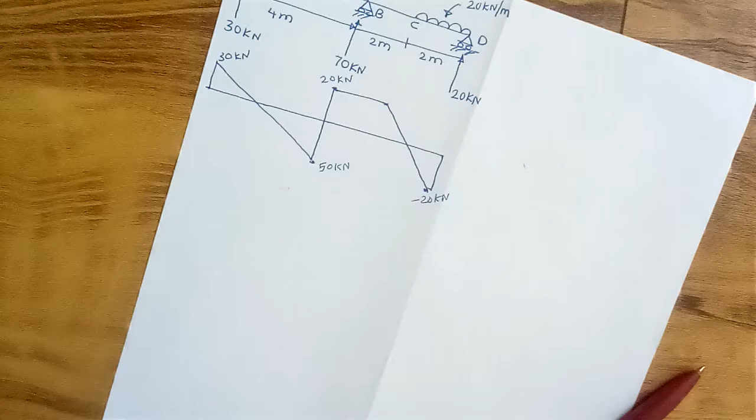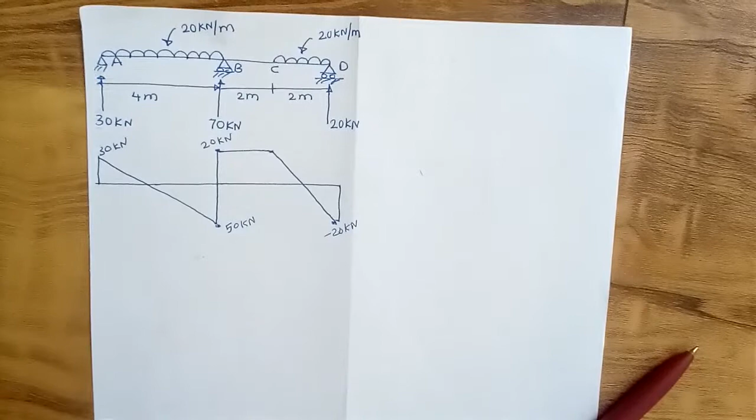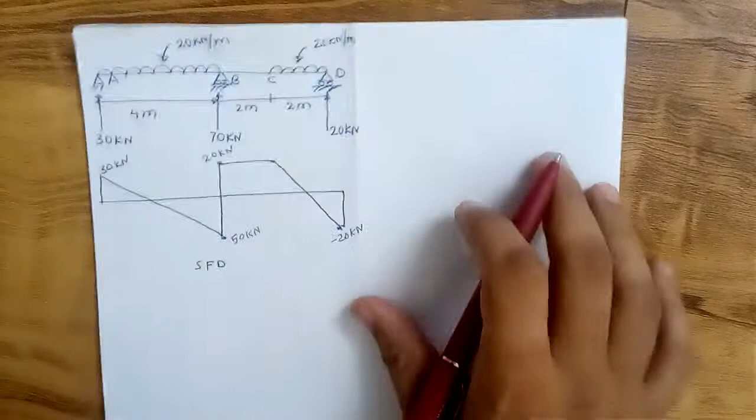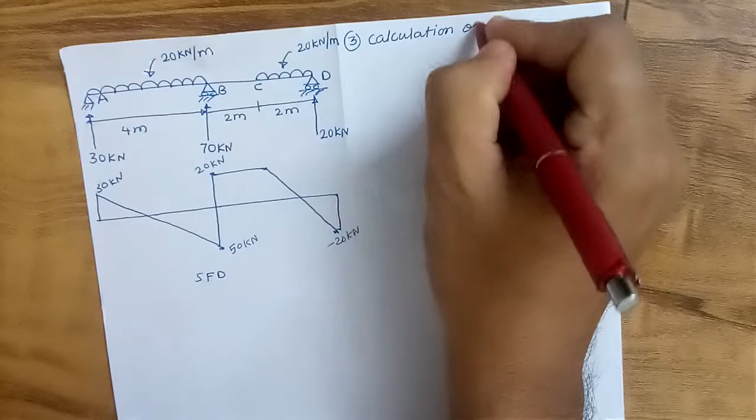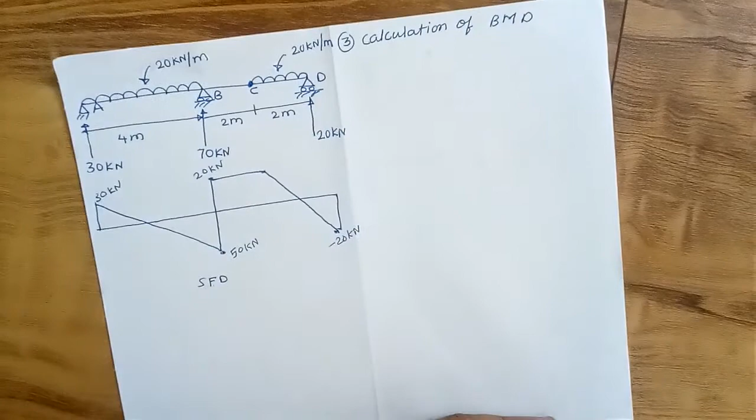So this is the third point, calculation of BMD. Okay, and at this point, that is nothing but point C, there is an internal hinge.

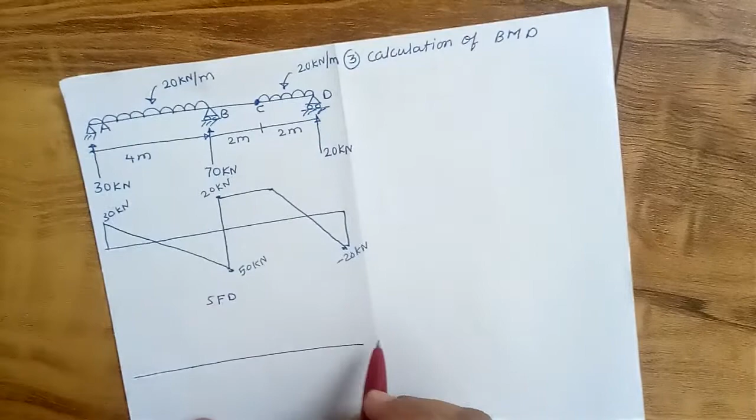So now suppose this is the reference line for drawing the BMD of this structure. Now let us calculate the bending moment at point B. We know the sign conventions like this: this is positive and this is negative.

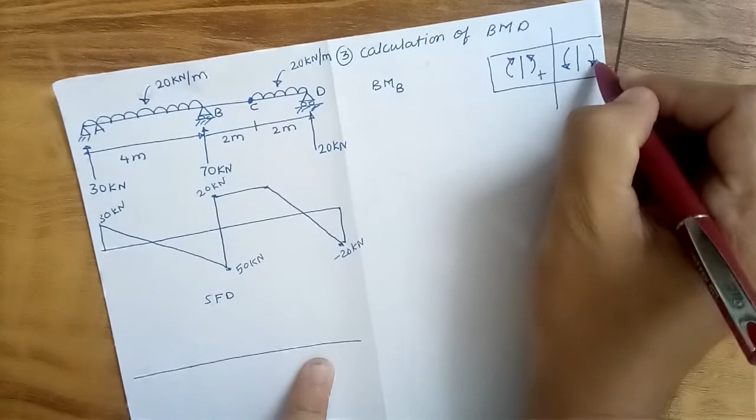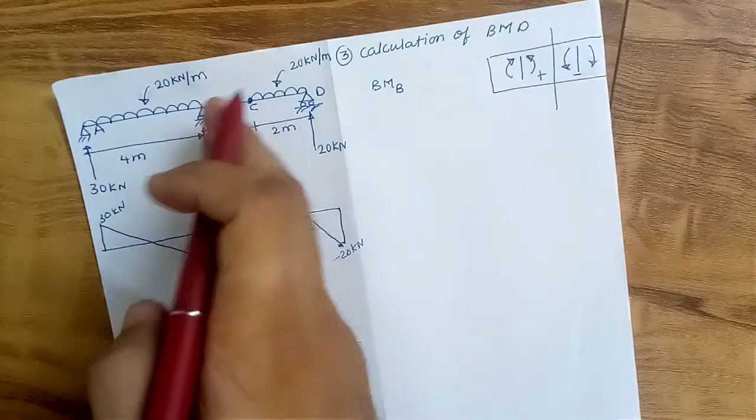So while we are calculating bending moment at point B, let us consider the right side from point B. Okay, so taking the right side from B, it is in anti-clockwise direction, so that will be considered as positive.

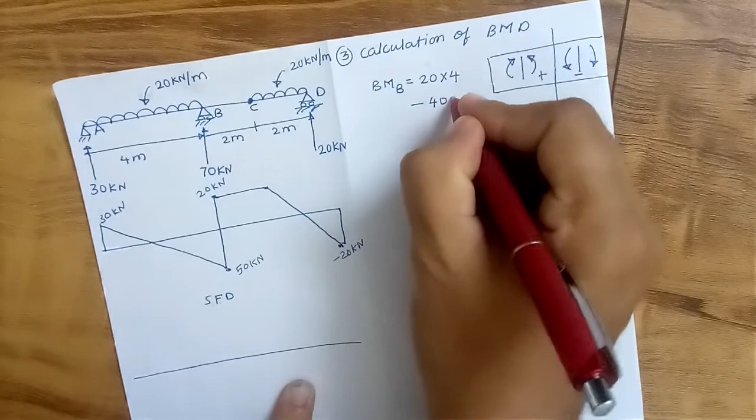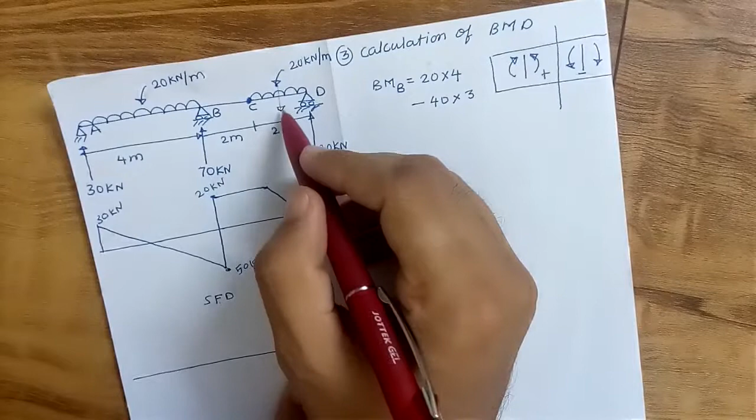So bending moment at point B is positive 20 into 4, and it will rotate in anti-clockwise direction, so that will be negative. That is 20 into 2, that is 40, and it will act at a distance of almost 3 meters, because this will be the point of application of this load. So 20 into 4, that is 80, minus 40 into 3, that is 120 kilonewton meter. So the difference of these two is 40 kilonewton meter.

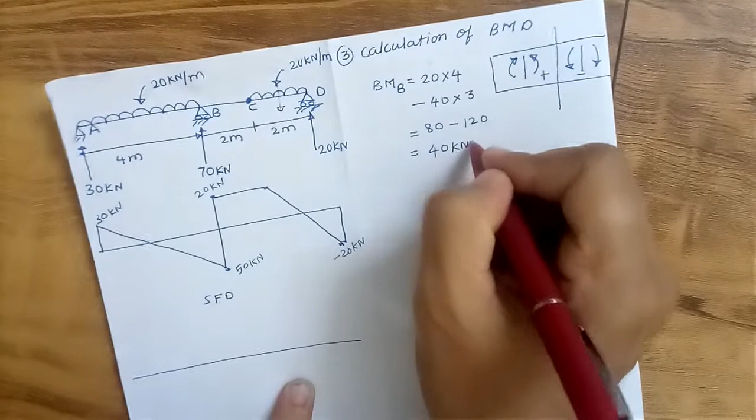So that will be the bending moment at this point, and it will be negative. So this is point B, and below that the bending moment will be 40 kilonewton meter. So we know this point.

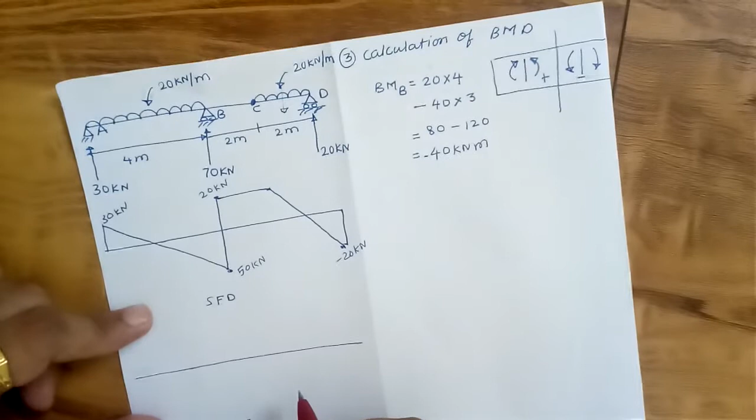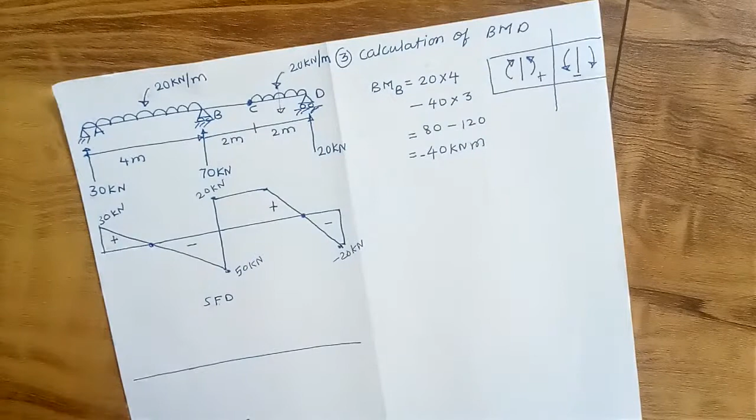But as I have already told you, when there is a change in shear force, there will be maximum bending moment at that point. So here in this diagram there are 2 points where this inclined line is changing sign, the shear force diagram is changing from positive to negative. So at this point there will be the maximum bending moment, and at this point there will be the maximum bending moment. So we should know the exact location of this.

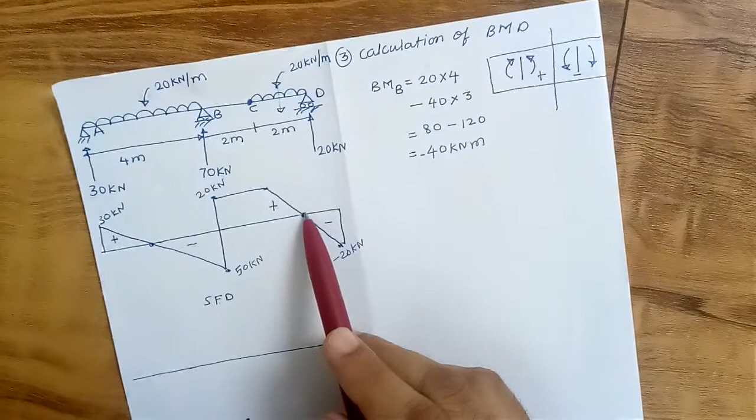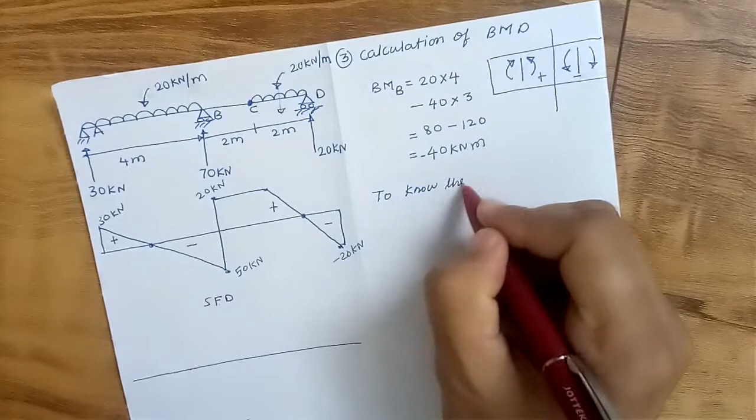Okay, at how much distance from point D is the zero shear force. At that point we will calculate the bending moment. So to know the point of zero shear force from D, we know the sign convention for shear force like this.

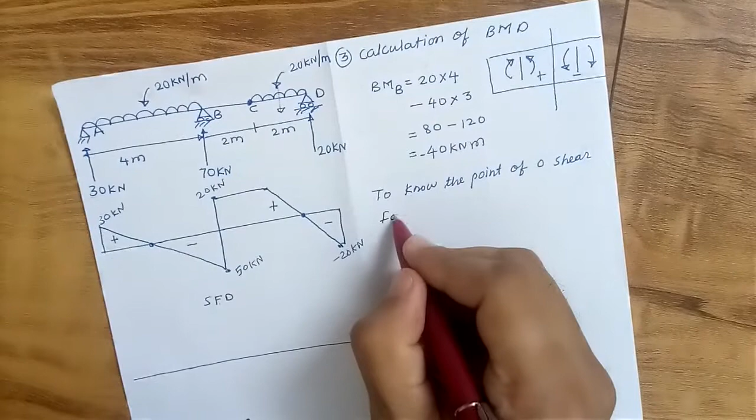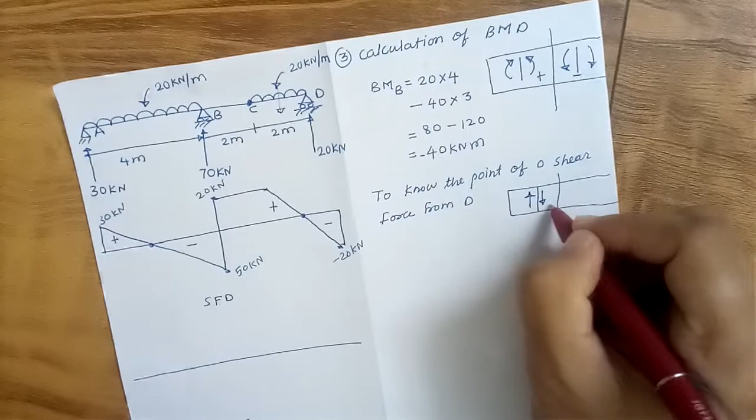This will be considered positive, this will be considered negative. So we know this. So at this point, let this point be E, and it is acting at a distance of x from point D. So this is point E. So shear force at E, we know that at E shear force is 0.

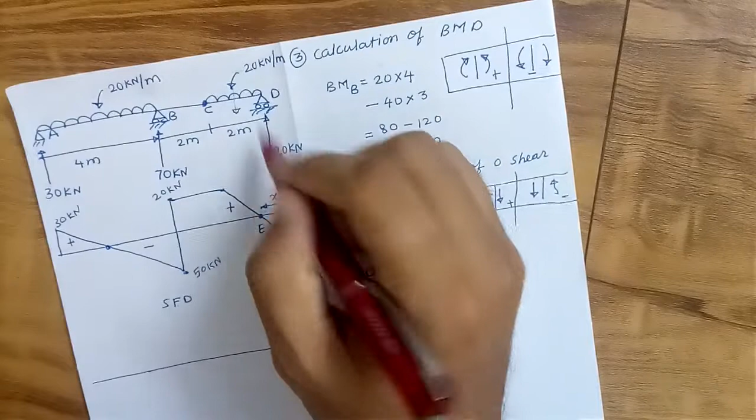So considering the right side of the section, there will be the 20 kilonewton force which is in upward direction, so it will be negative 20. Okay, and this 20 kilonewton load acting at distance x will be acting in a downward direction. So that will be, on the right side of the section, acting in a downward direction.

So that will be, on the right side of the section, acting in a downward direction, so that will be 20 plus 20 into x. Okay, so that's why this minus 20 goes to this side, becomes 20, and is equal to 20x. So 20 and 20 get cancelled and x is equal to 1.

So it means at the distance of 1 meter the bending moment is maximum. So let us calculate the bending moment at that point. Okay, so now the bending moment at point E.

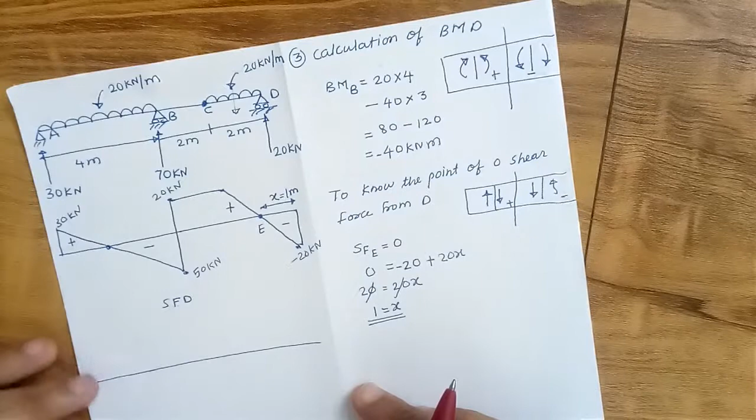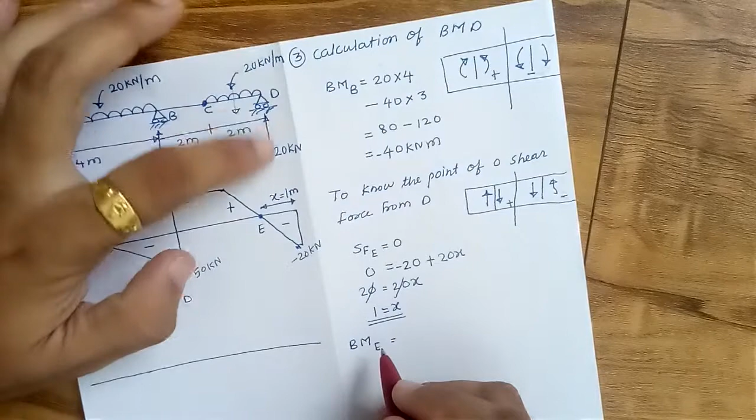Okay, so this 20 kilonewton force is going to rotate in anti-clockwise direction, that will be considered as positive as per the bending moment sign convention. So that will be positive 20 into 1.

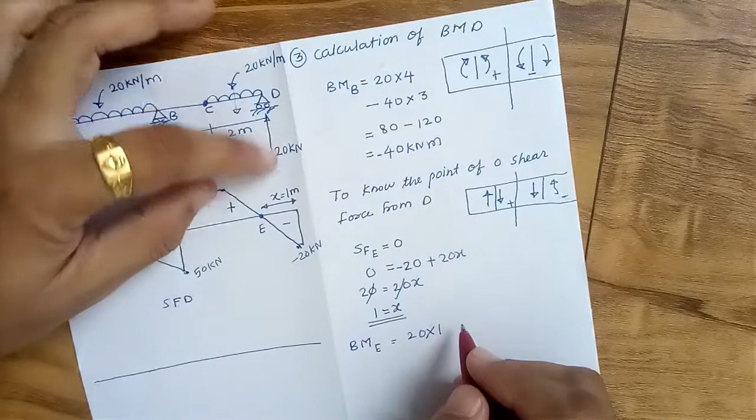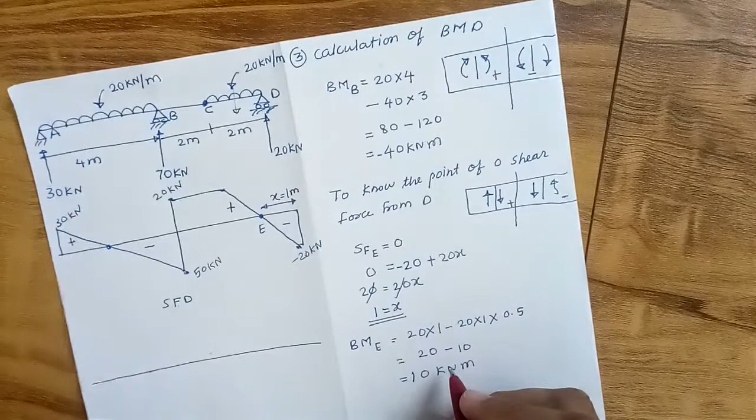And again this load acting 20 kilonewton per meter on 1 meter length is in clockwise direction, so that will be considered as negative. So it will be negative, that is 20 multiplied by 1 multiplied by, it will act at a distance of 0.5, 20 into 1 into 0.5. So this is 20 minus 20 into 0.5, that is nothing but 10. So 20 minus 10 is nothing but 10 kilonewton meter. So this will be the bending moment at this point. So at point E there will be the bending moment of 10 kilonewton meter.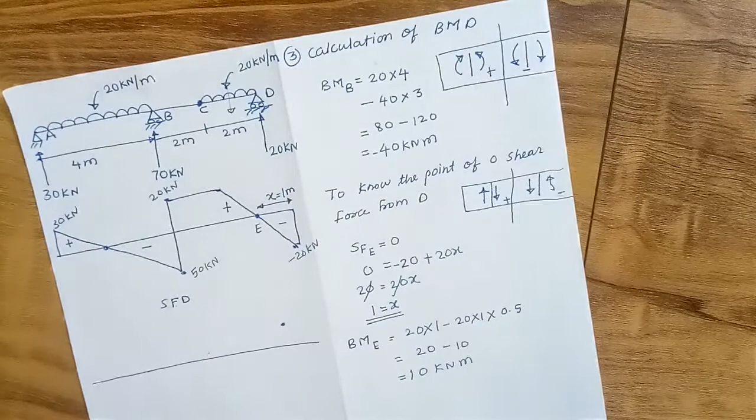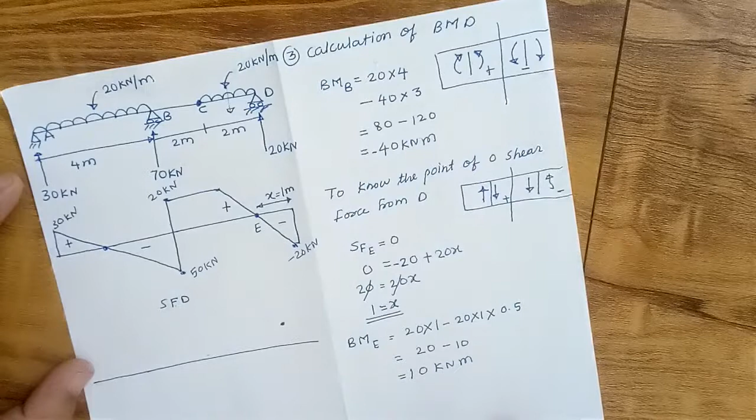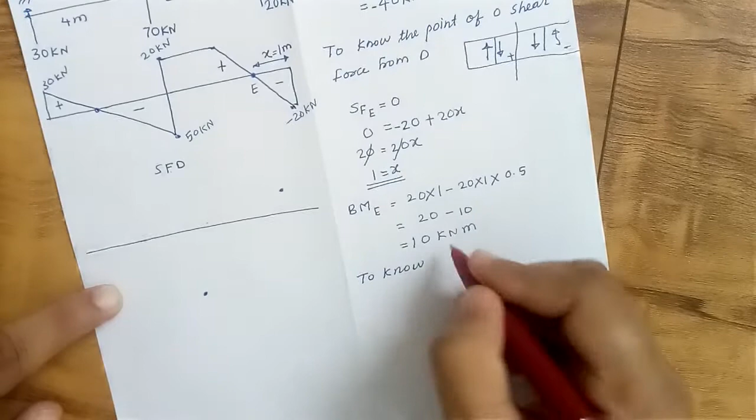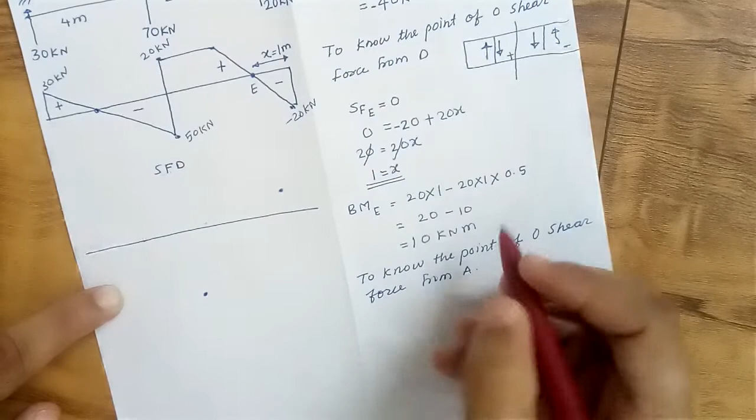Now again here there is a point of zero shear force. So let us look to find the point of zero shear force from point A. To find the point of zero shear force from point A, let us consider this point as F, and let us consider it is acting at a distance of x from the A support.

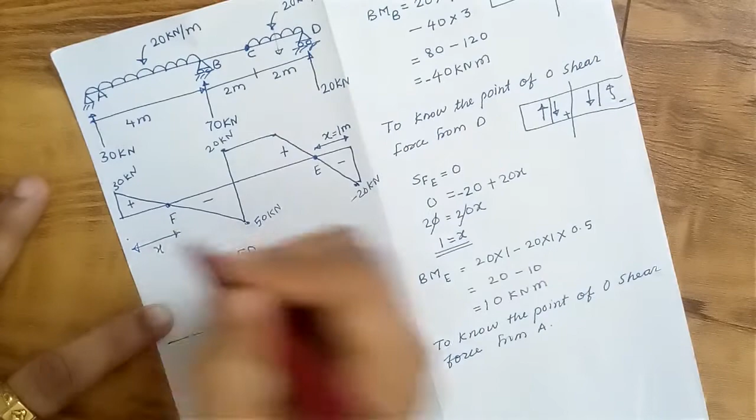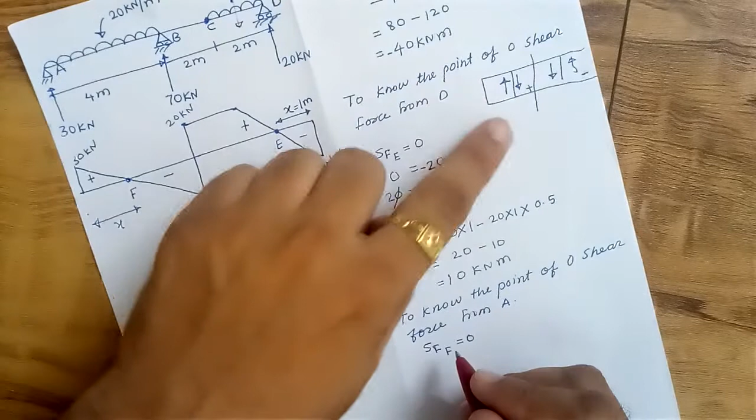Okay, so we know that shear force at F is 0. So consider the left side of this portion and calculate the shear force. Left side in upward direction is considered as positive, so that's why 30 will be positive. 0 is equal to 30 minus 20, as right side, left side of the section in downward direction, so that's why it is considered as negative, minus 20 into x. So minus 30 is equal to minus 20x.

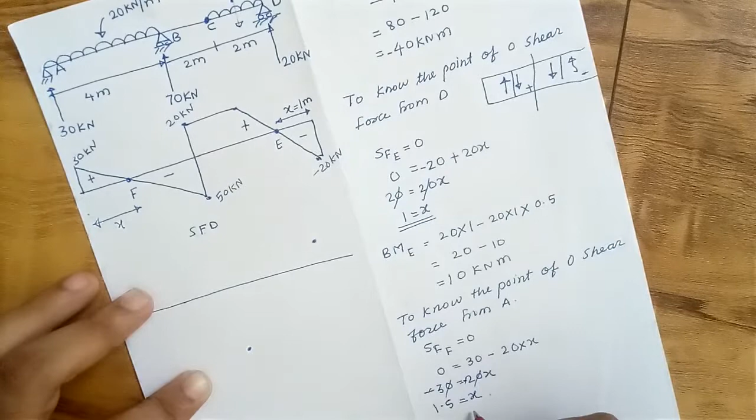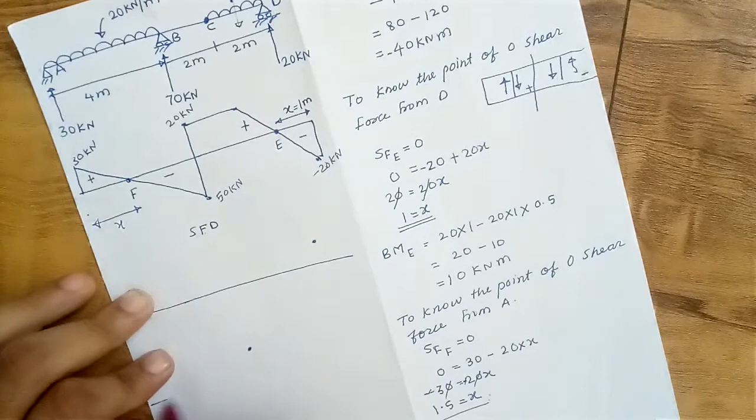So this gets cancelled, 3 by 2 is nothing but 1.5. So at a distance of 1.5 meter, the shear force is going to be 0. So let us calculate bending moment at point F.

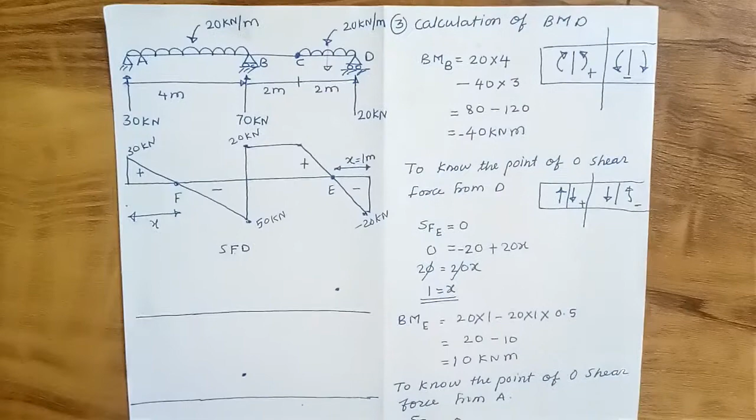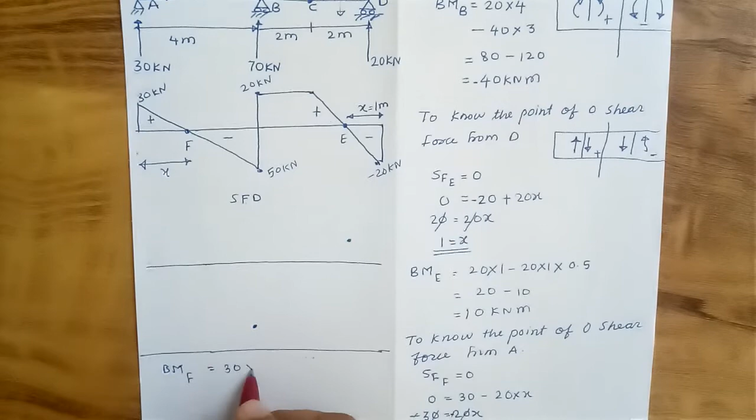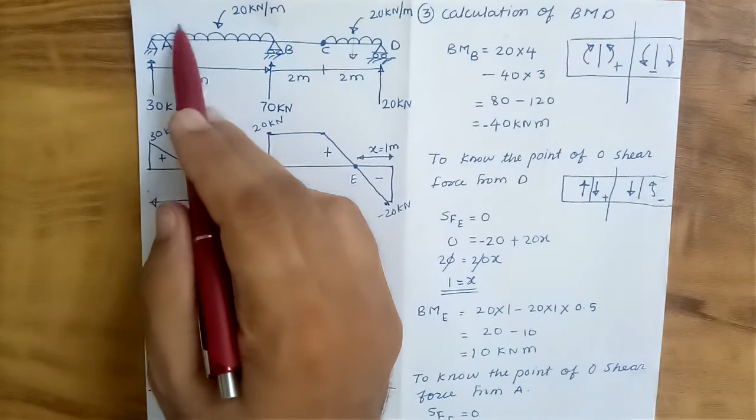So we are calculating bending moment at point F now. Bending moment at F is nothing but, it is in clockwise direction towards the left of the section, so that's why 30 into the distance 1.5, this moment will be considered as positive, 30 into 1.5, and on the beam there is a UDL of 20 kilonewton per meter. It is acting in downward direction and it will produce anti-clockwise moment. So left side of the section in anti-clockwise direction, so that's why it is minus 20 into 1.5 into 0.75. Half of 1.5 is 0.75, so that's why the bending moment at this point will be 22.5 kilonewton meter.

So at this point we got bending moment 22.5 kilonewton meter and it is positive. So locate this point like this, that is positive. So we got all the points of bending moment.

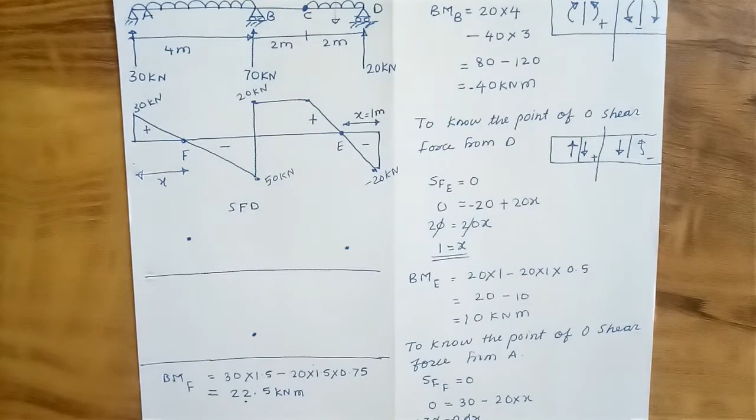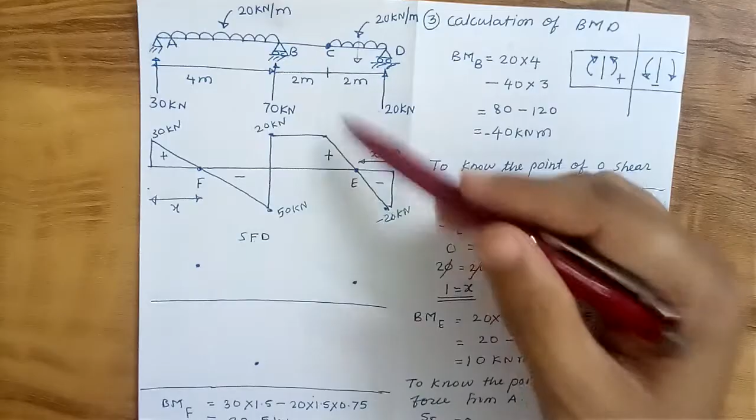As there is UDL over the length of this beam, and it is an inclined line, up to this portion there will be a 2-degree parabola. So up to point C, this is 2-degree parabola. Then there is no load over this section, so that's why there will be a straight line variation up to this point. At this point the bending moment at point B we have already calculated, that is 40 kilonewton meter, negative, so that's why it will be joined by straight line, so it is 40 kilonewton meter, and this is, as we have calculated, 10 kilonewton meter.

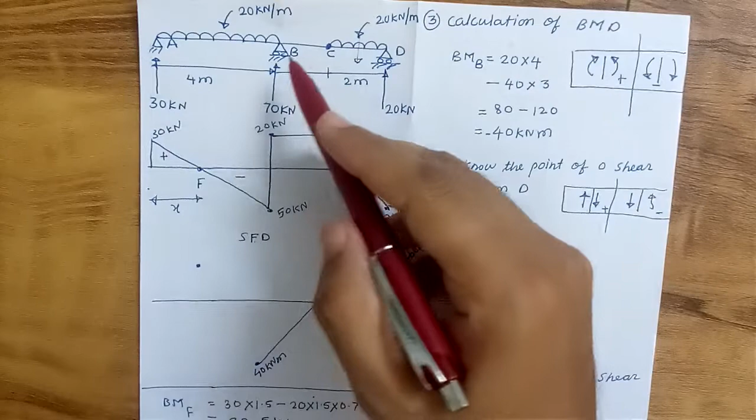Now again there is a UDL all over this span, there is a positive bending moment at this point, so all over this length there will be a 2-degree parabola. Let us draw it like this, so this is 2-degree parabola, and bending moment at this point is 22.5 kilonewton meter. So this is the BMD for this calculation.

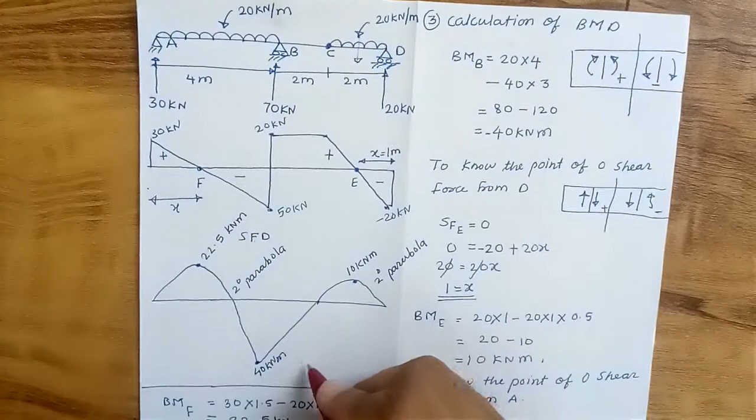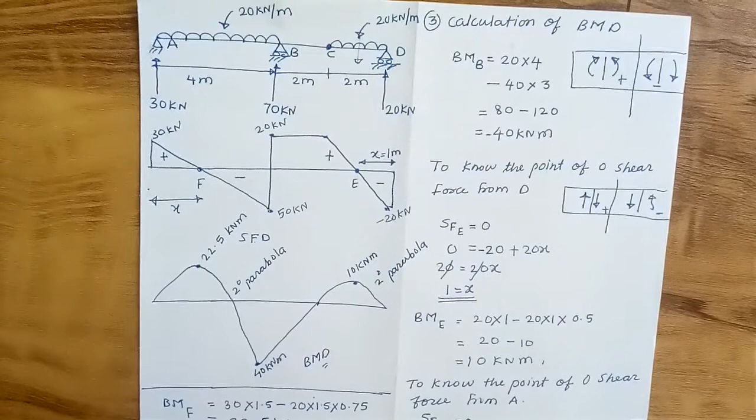Okay, so this is how we have to draw the shear force diagram and bending moment diagram. The only difference in this problem was that at point C there was a hinge, and as we know, a hinge allows rotation, so the bending moment at the hinge will be 0. So we got an additional equation, and that's why we could analyze this beam.